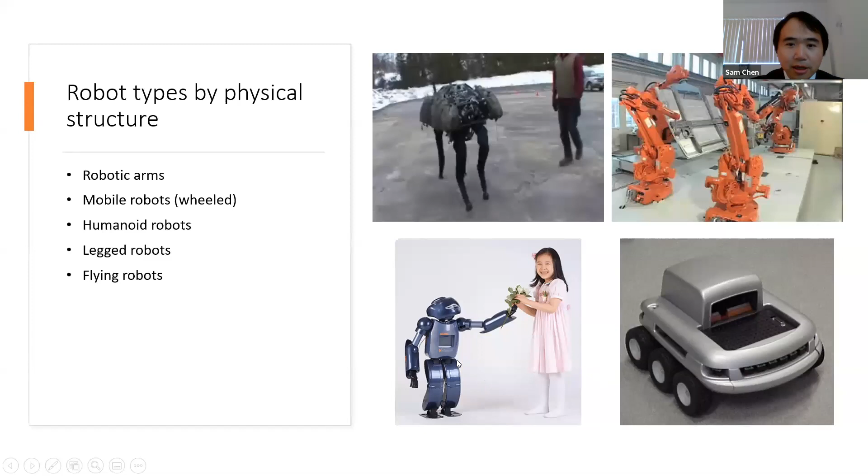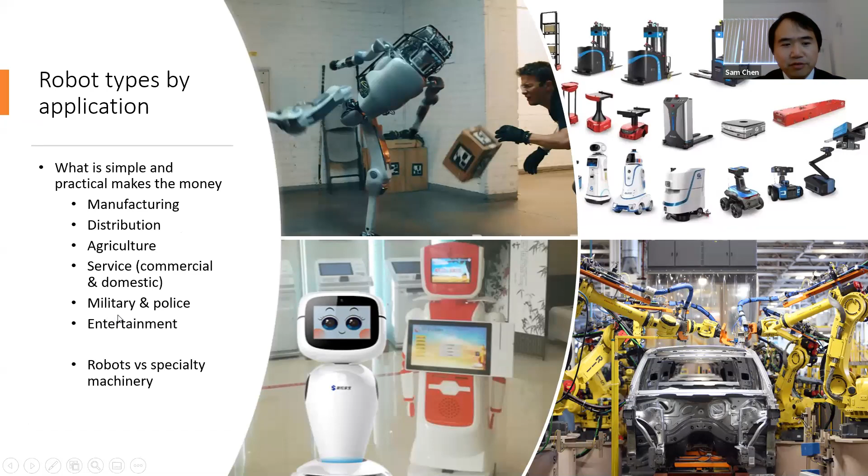By application, there are a lot of robots working in manufacturing, distribution, and agriculture. More and more of them now work in service, followed by military and police functions, and some robots work in entertainment.

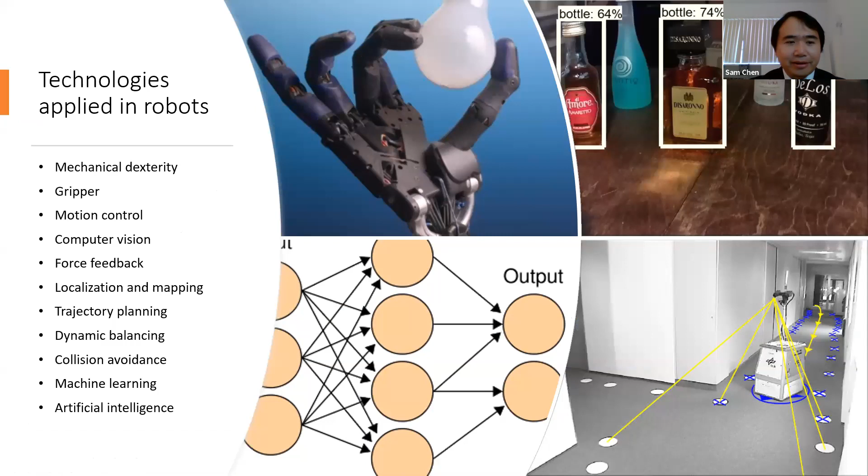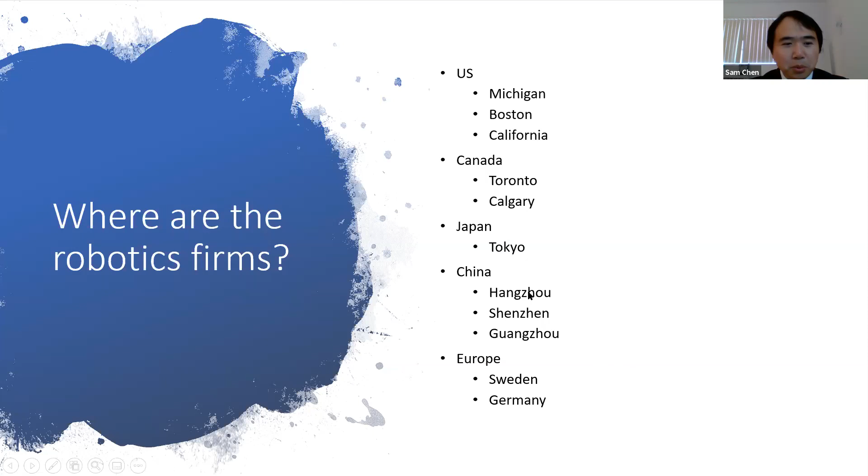There's a wide variety of technologies behind modern robotics, such as mechanical dexterity, illustrated by this mechanical hand, very similar to a human hand. Then there's machine vision and machine learning, which here is a graph of a neural network. And there's another technology for mobile robots called localization and mapping. Those are the locations around the world where robotics firms are very dense.

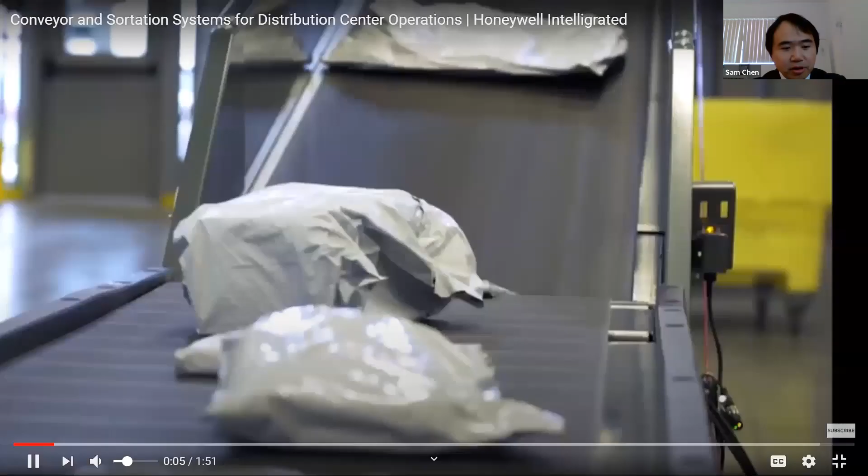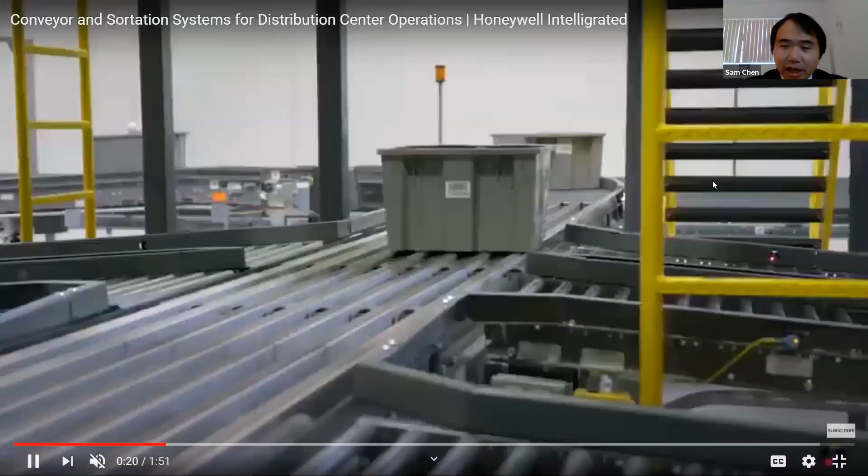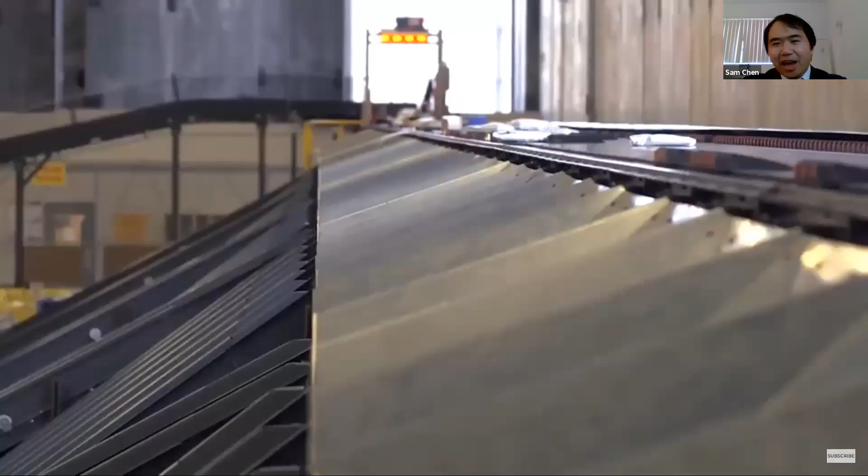This does not meet the e-commerce demand, because e-commerce has literally made the volume of processed goods probably 10 times higher than it used to be. Therefore...

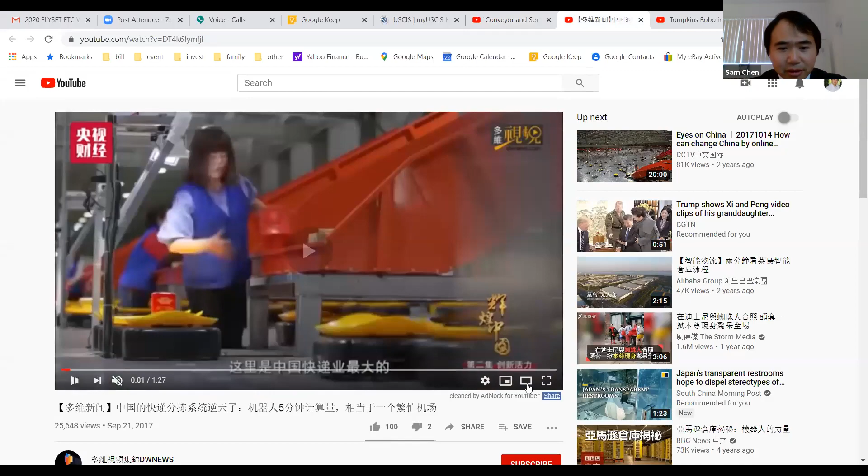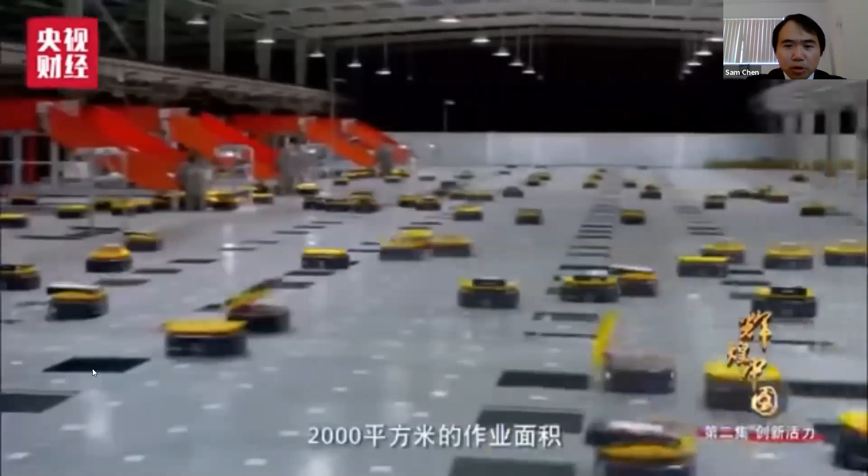This kind of robot we call the mobile sortation platform. Those robots are individual, each like a computerized robot, and you can put thousands of them in one facility. They are two-dimensional or even three-dimensional, moving on a large platform at about 2 meters per second. You see all those holes in the platform - those are destinations.

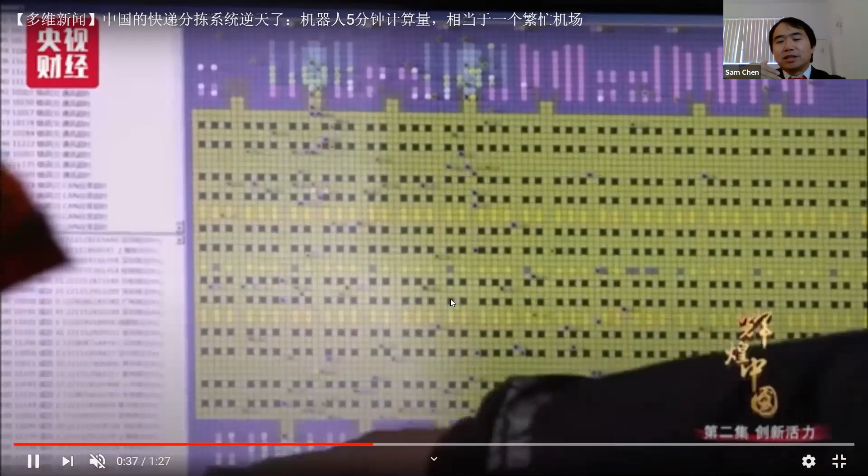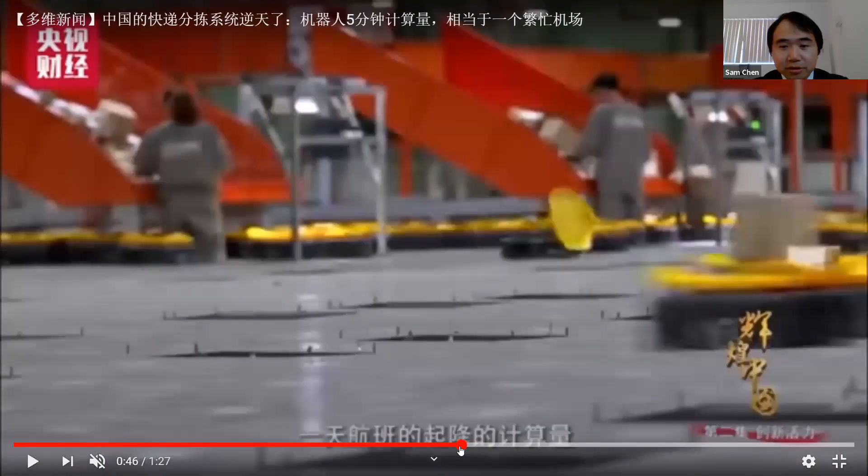All those packages or goods go to a certain destination or a certain customer. The robots carry all the products - they come through this inlet dumper, all mixed together, and a human operator takes them out and puts them on each robot. The human operator doesn't have to do any sortation; all she or he does is put the products on each robot. The robot will come, pick it up, and do the sortation itself - the robot knows where the product goes. This is really what's powering the logistics of modern-day e-commerce delivery.

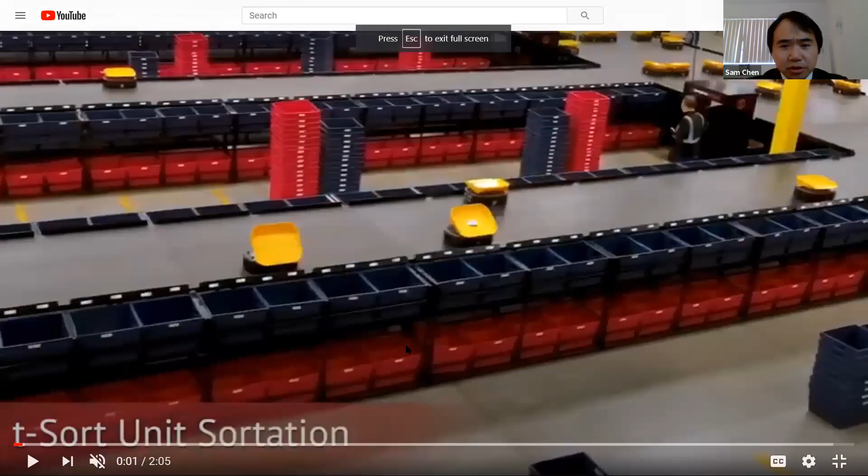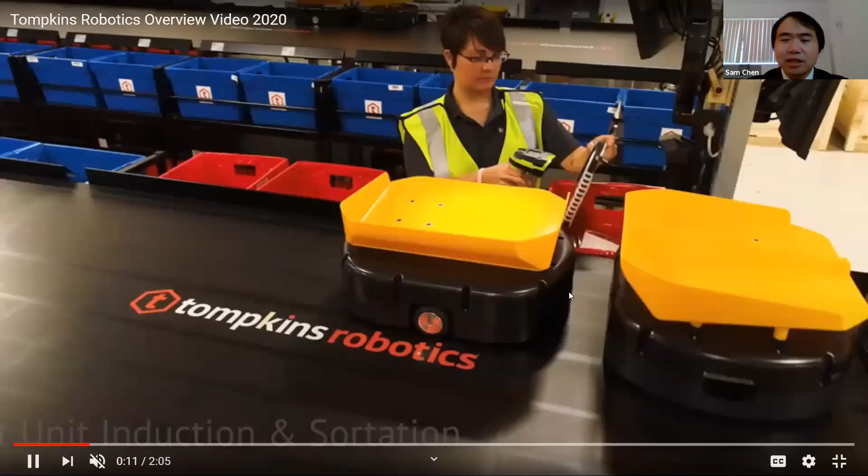That's how we achieve 2-day delivery with Amazon or Walmart these days. So the version I just showed you is the Chinese version. When we brought the technology to the US, we had to adapt it to a different system - for example, all the destinations are in bins or chutes on the outside of the field.

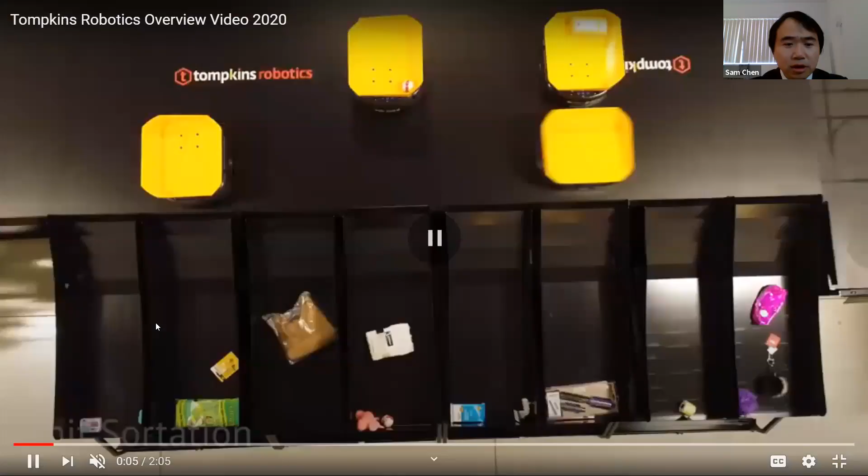So we did 2 changes. One change is to locate the destination on the outside edge rather than in the holes on the inside, okay? I see some chats.

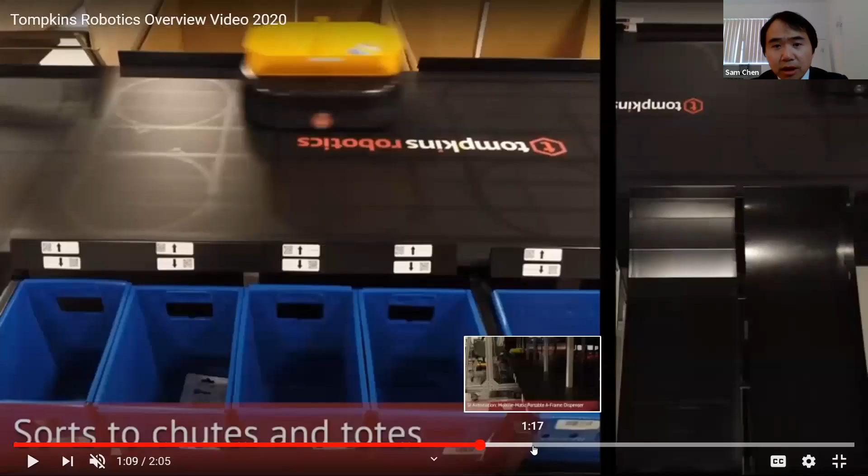Okay, great. So that's one change because the US warehouses, they're built very differently. And another technique we introduced is, let me see if I can find it here. Oh, here we go. So see this robotic arm?

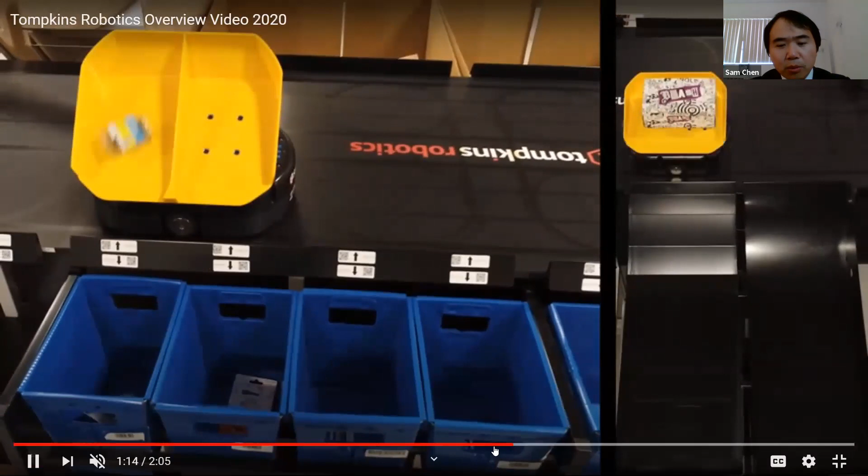It replaces the human operator you saw in the previous video. In China, they use human operators to pick the things from a box, from a dumpster, and put them on the robots. But here, we introduced the US technology, which is to use this autonomous robotic arm that's aided with vision to pick. So that's a huge step forward, okay?

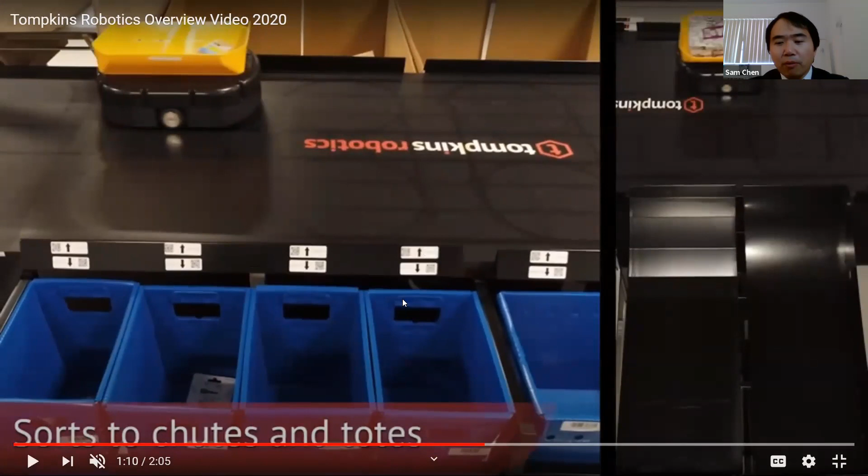So these videos, you can watch the full thing later on your own, but I want to talk about the technical aspects of the system. Let me go back to the presentation, okay.

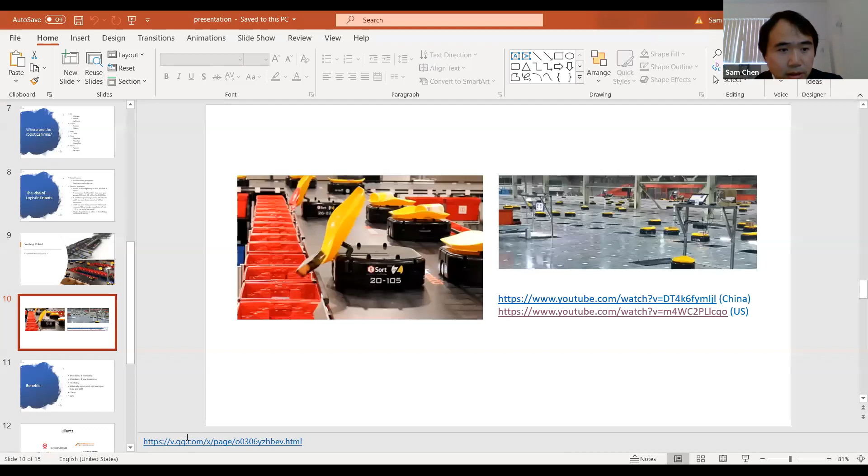So what are the benefits of using robots? First, robots, they are modular. So for example, if we put down 1,000 robots to process 10,000 orders per hour, next year, we have more volume, we have more customers. We can just put down more robots processing the same order.

If we use traditional machinery such as conveyors, then you can't really connect more conveyors to them because they're not modular, they're not like robots. It's just the number of robots you have to get it right. So we have the scalability with mobile robots.

And the next benefit is low downtime. It also has to do with the modular pattern of the robots. Let's say a robot breaks, its battery blows up, or one robot crashes and destroys itself. It's very easy to deal with. We just take out that robot, it doesn't affect the rest of the crowd, okay?

With the traditional conveyor-based sortation system, it's linear. So it's thousands of portions or sectors of conveyors that are connected together. If one sector of the conveyor breaks down, the whole system cannot run. So there's a much higher requirement on the uptime of the conveyor system, but with the robots, we can tolerate the robots breaking down or any other issues.

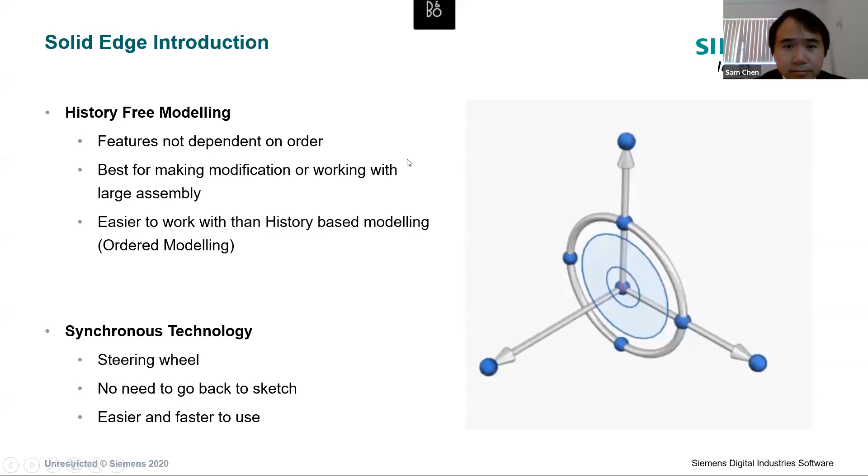So a little bit about Solid Edge. Solid Edge is history-free modeling, which is a little bit different from history-based modeling, where everything is dependent on the steps taken to create a model. In Solid Edge, it is considered history-free, so the features are not dependent on the order.

Let's say we make a part file, a model, a car for example, and it has 100 different parts and features. Let's say you get to feature 100 and need to go back and change feature number 2. What you're gonna have to do is roll all the way back to feature number 2, make the change, and hope the rest of the features dependent on that change don't get an error. So that is what it is for, when you have large parts, large assemblies, that is what it is used for.

So Solid Edge is history-free modeling where the changes you make, all the features you make to a model, are not dependent on what steps you take. You can also change the order if you so desire, because designing is not a fixed process. You could be making a car and design it 100 different ways, so the order that you make it should not be a limiting factor. This is best used for making modifications or working with a large assembly.

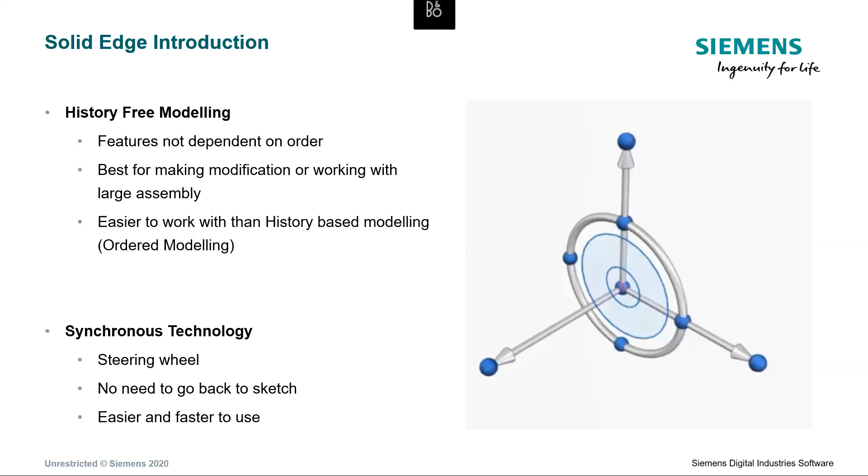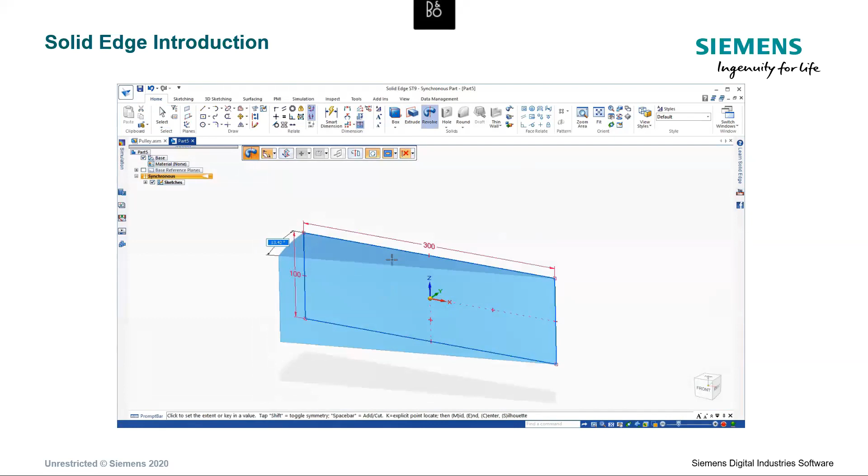So this is the UI, the user interface for Solid Edge. It kind of looks like a Microsoft Office product, where you have the tabs and different commands. So simply go ahead and create a rectangle. When you click inside of this, you'll see the arrow pop up, and you can immediately start extruding. You can push in, pull, go in one direction or both directions. You can even move the steering wheel to the side and revolve automatically. So for this one, let's go ahead and extrude symmetrically about the plane. Now you'll notice how the dimensions from the sketch directly migrate onto the solid model itself, and you can make changes to the dimensions directly, like we're doing right here.

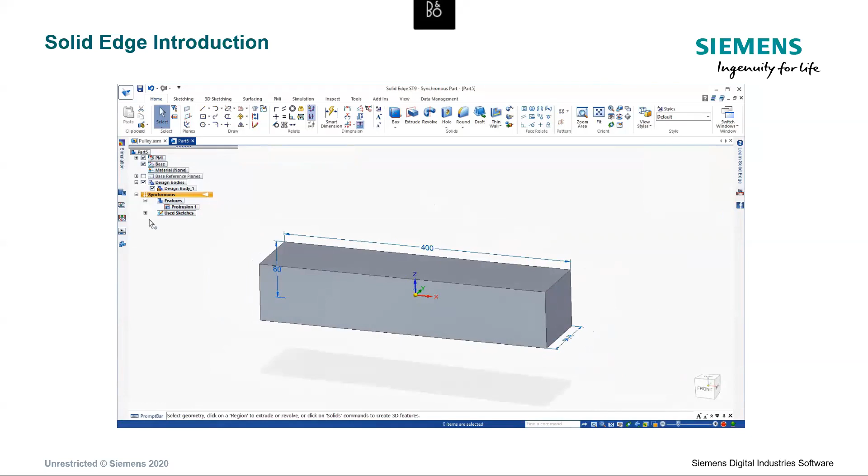You can even make modifications to the model itself without having to go into commands. You'll notice there's a little design intent panel on the top right side, which appears because we created the sketch symmetric to the coordinate system in the middle, so it automatically detects a symmetry relationship. If we don't want that, we can uncheck it from that panel.

We can make modifications just like that. I was talking about how you can go ahead and delete the sketch as well, so the solid model will not be dependent on the sketch at all. If you were to do that in other software, you'd have a problem and a whole bunch of errors. Now we'll create a little line, a little region, and push in and pull out immediately, without clicking any command whatsoever, directly from the model.

Let's say we want the vertical section and rotate it about 15 degrees. If we were to do it on a history basis, we'd have to go back to the sketch, change it, and then roll it back. In this case, we can make direct modifications by selecting and moving the steering wheel to the axis, and immediately start rotating. We can even make it longer if we wanted to, or move it to the side, making changes right there and then.

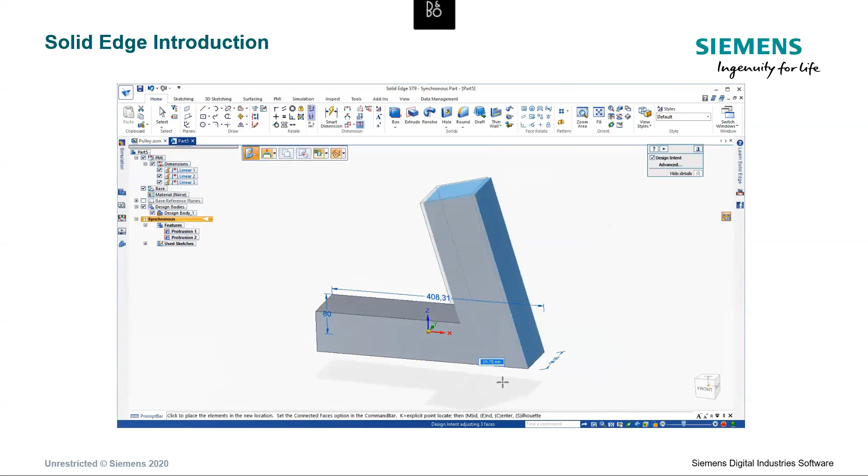So that's just some of the cool features and an example of how you can use Solid Edge. Now this is an example of a pulley assembly. This example will show you how to make modifications immediately just by one click.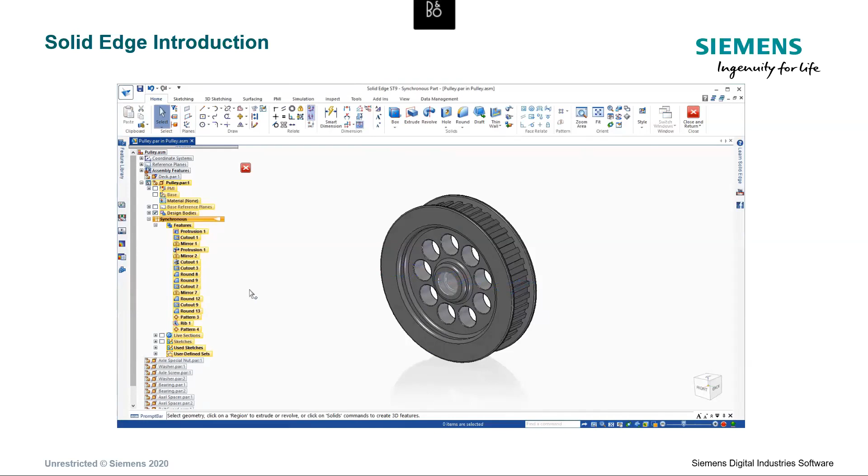There are a lot of features, a lot of parts, and we have to make modifications. How do you do it in a large assembly? Well, by selecting a few specific features and using the steering wheel, we can immediately make the pulley wider, instead of having to individually change the holes, the rounds, the fillets—all of those changes happen immediately.

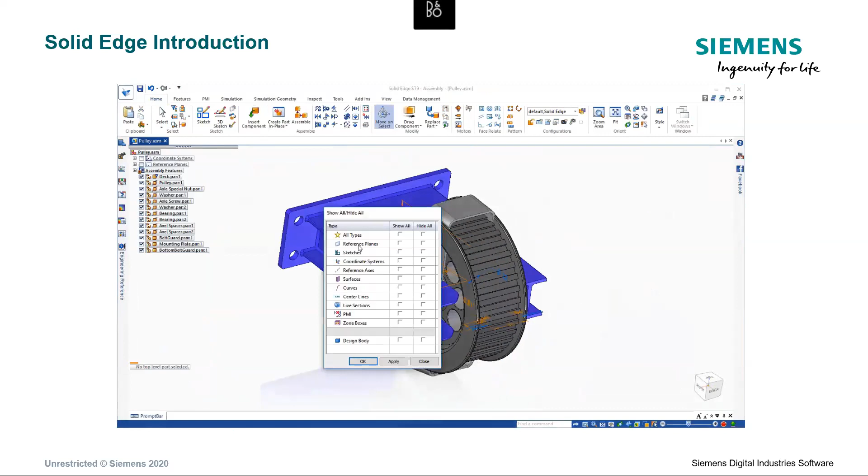Now you'll notice once we made the pulley wider, it's not fitting into the assembly. So what do we do? Should we make it wider individually? No—this is Solid Edge, so we're going to do the same thing: use the steering wheel by selecting a few specific faces to make the entire assembly wider.

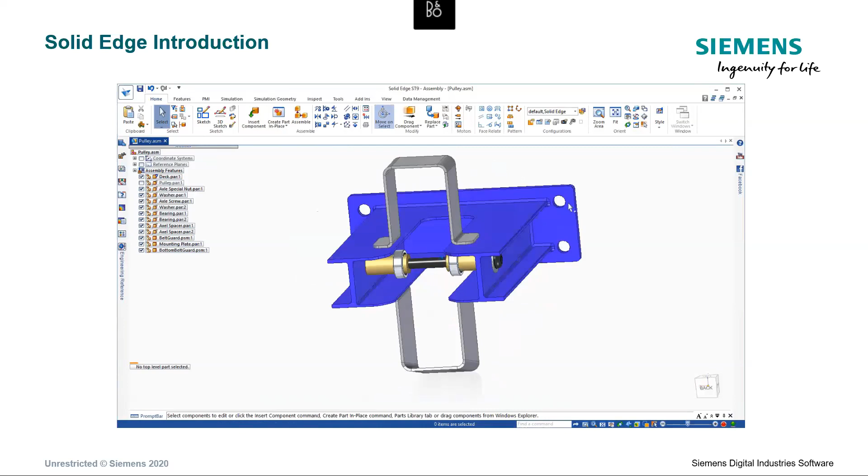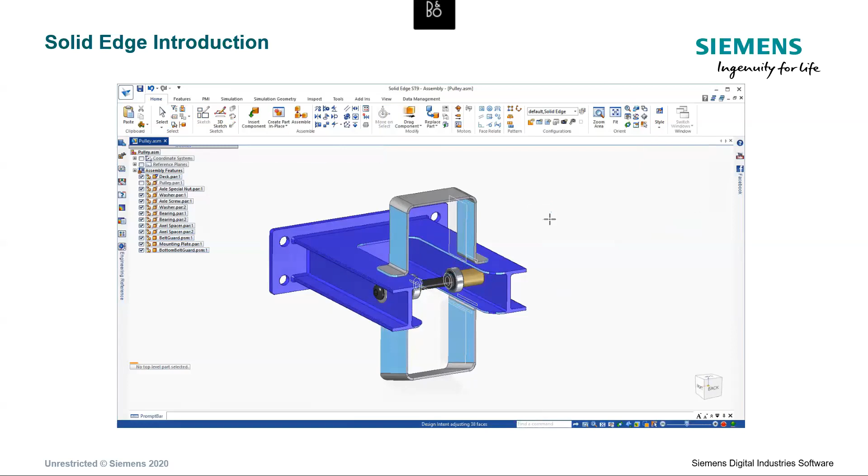So we select a few specific faces that are going to dictate how wide the assembly is. Then, using the steering wheel, with just one click, we can make the entire pulley assembly, the holder, wider by 10 millimeters. Then we bring the pulley back in and can see immediately that it's a good fit. So making a few modifications doesn't require changing all individual parts or components.

On this one, we're going to make the spacer, the belt guard, match with the top one, and we can even make it wider just by selecting it and using the coplanar command. Just like that, we're able to make it longer without having to go back to the sketch or individually make those changes.

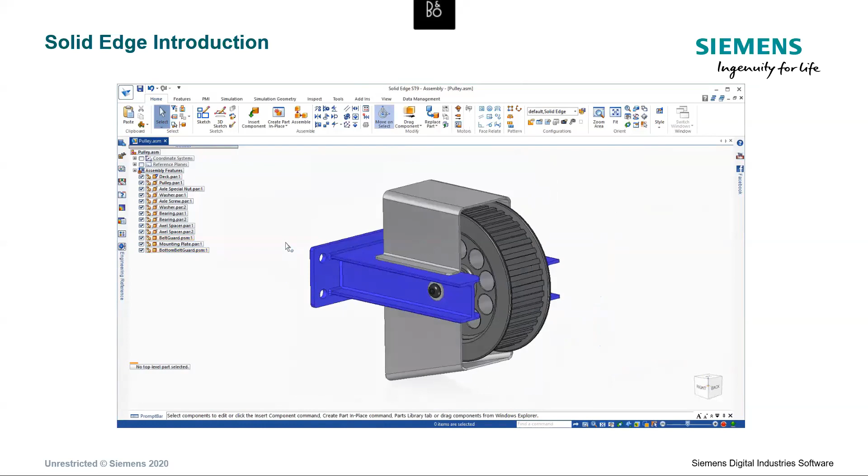What about if users are using CAD files from other software? Solid Edge allows you to bring in part files from SolidWorks, Fusion 360, Creo, and others. Because Solid Edge is history-free modeling, we don't have to worry about how the parts were made—you can make direct changes to the model and continue your progress where you left off from that other software. So if you're using Fusion 360 and want to try out Solid Edge with a part file you made there, you can immediately bring that into Solid Edge, which I'll show you in a second.

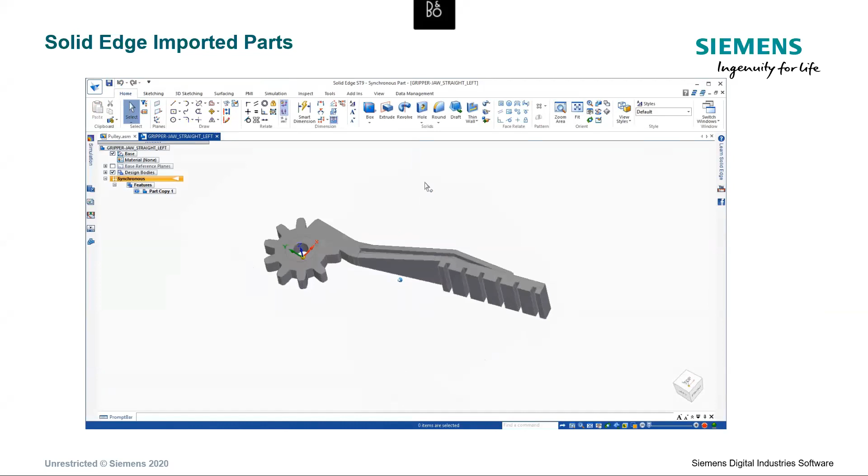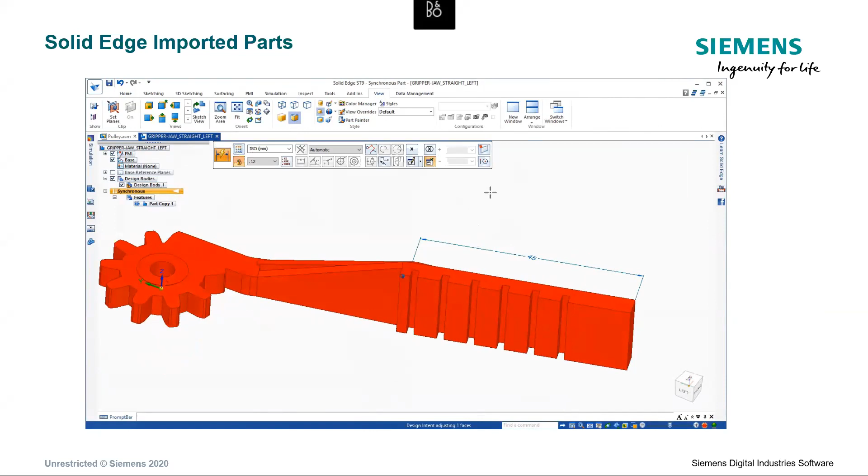So in this example, we're going to bring in a jaw gripper that was made in SolidWorks. When you bring in a part file from other software, it does not contain any features, as you'll see on the left-hand side. It's considered a dumb solid because it doesn't have features. It works for Solid Edge because Solid Edge doesn't care about the steps that were used to make the model. We're going to immediately start making changes just by placing a few dimensions and then making changes to those dimensions. We can start changing the model itself without having to worry about the sketch or the steps.

So we'll make the little extension. We can make it one side or both sides.

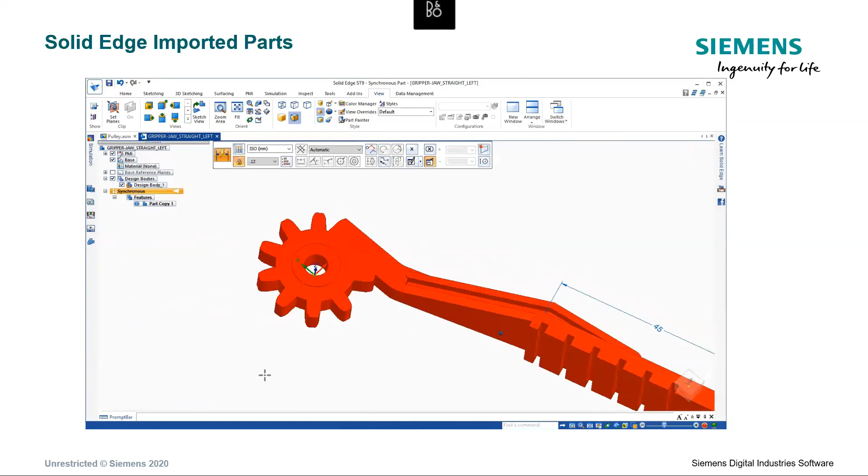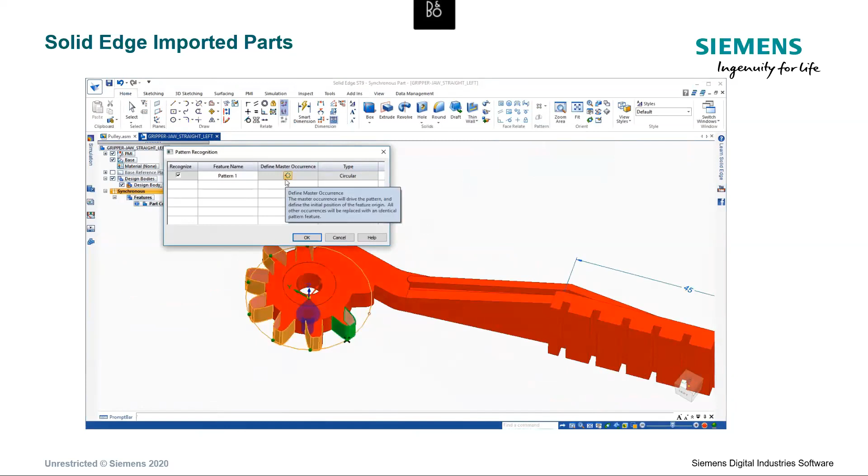Now, another feature that Solid Edge has is pattern recognition. You'll notice it because the teeth in the gripper have a red circular pattern. We can use the pattern detection tool, and it automatically detects there's a circular pattern, saying that some of them are suppressed. By pressing OK, it automatically detects and comes into our Pathfinder, our feature tree. We can immediately make changes from 10 teeth to 12 teeth, just like that, without having to redesign or go back to the sketch.

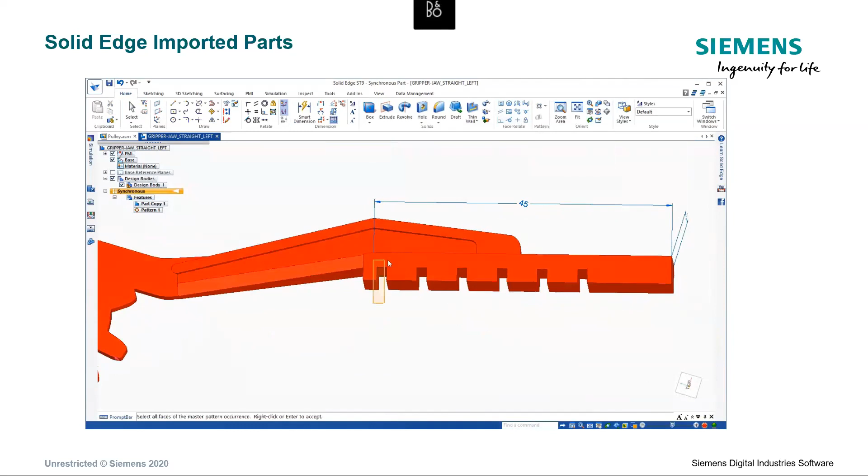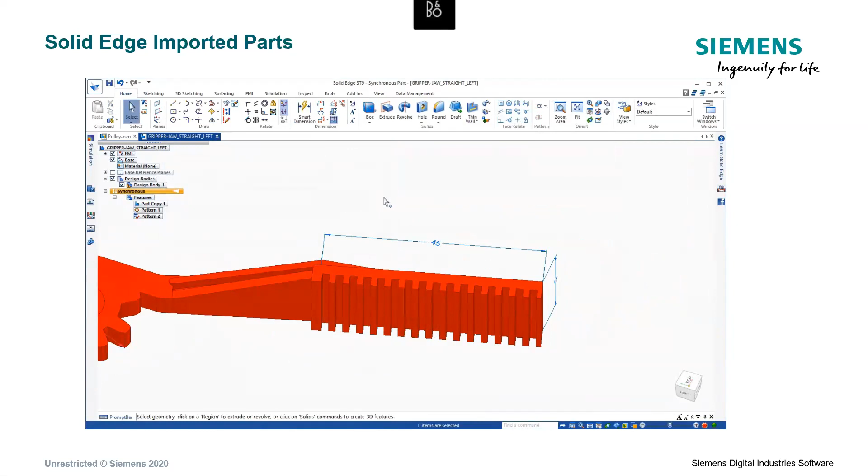We'll do the same thing for the rectangular slots. Just by box selecting those, we can detect that there's a rectangular pattern, and we can make changes just like that. From 6 teeth, we can make it however much we want. So without having to make any changes or modifications, we can easily do that now.

Now this model is sitting on top of the coordinate system, and it's not symmetric to it. So if we were to pull the middle section, you can see right there that it's not symmetric. What if we wanted to make it symmetric?

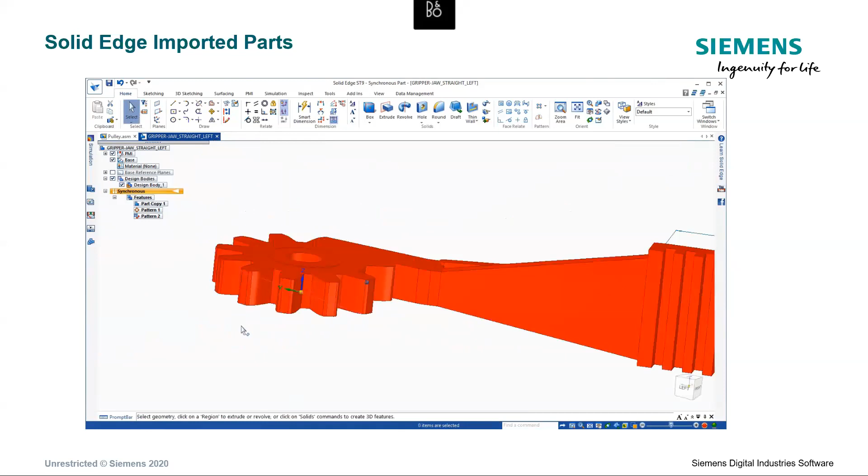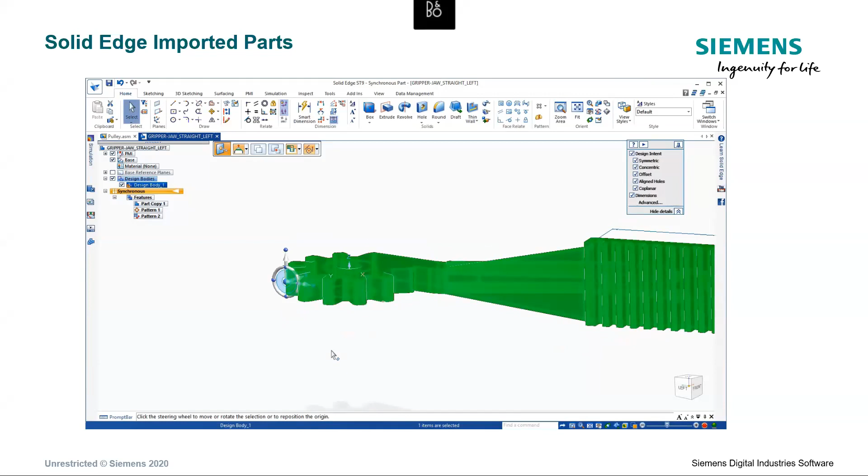We can easily change that by selecting the entire model using the quick pick, and we can take the steering wheel and put it into the midpoint of the model and match that to the coordinate system. The midpoint will be exactly on the coordinate system. So now when we pull it, you'll notice the software automatically detects there's a symmetry, so it pulls in both directions. If you want to turn that off, you could just press S or use the design intent panel.

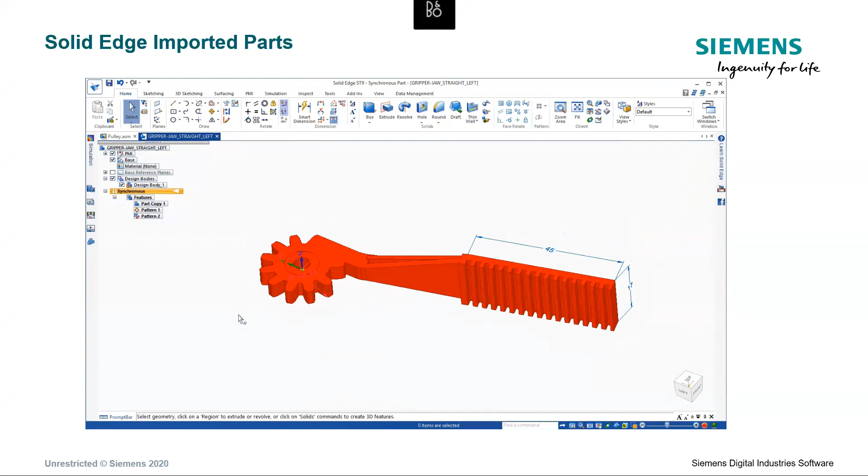So that's just an example of how you can bring in part files, part models from other software and immediately start making edits and changes and continue where you left off.

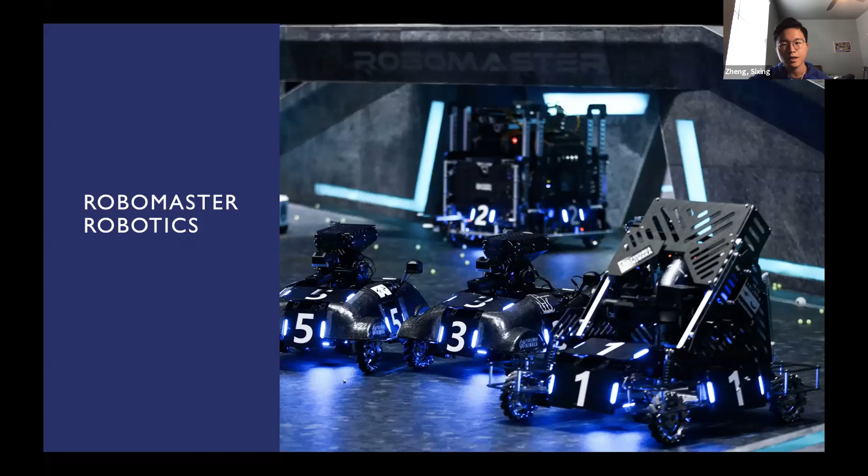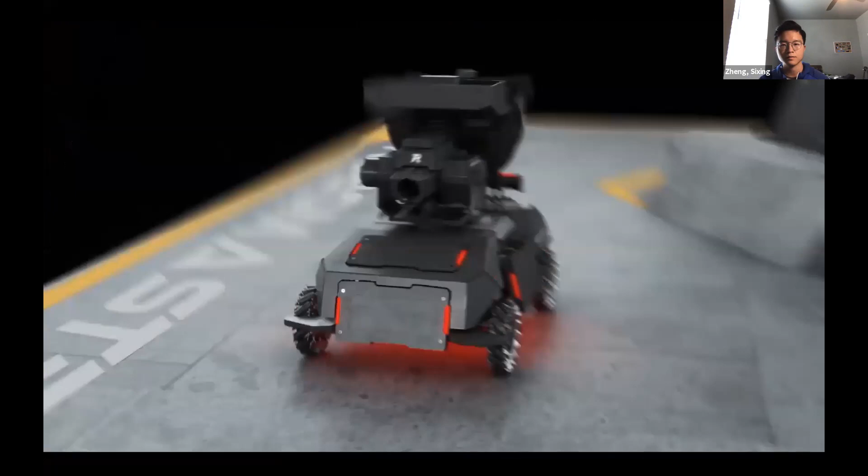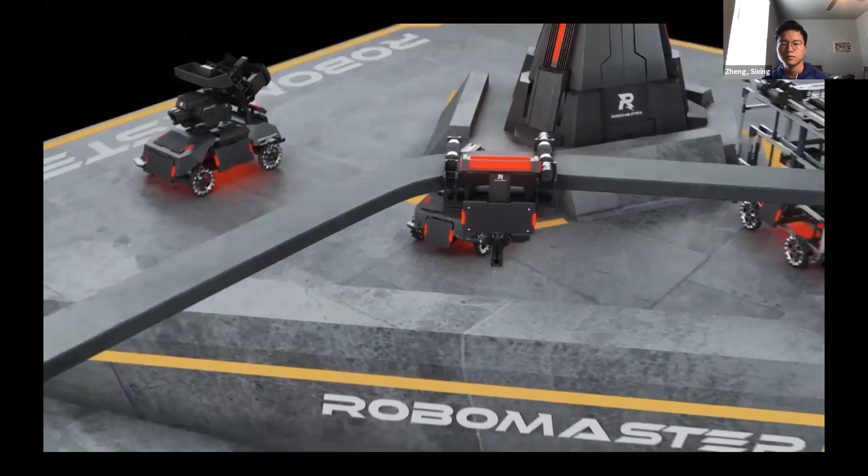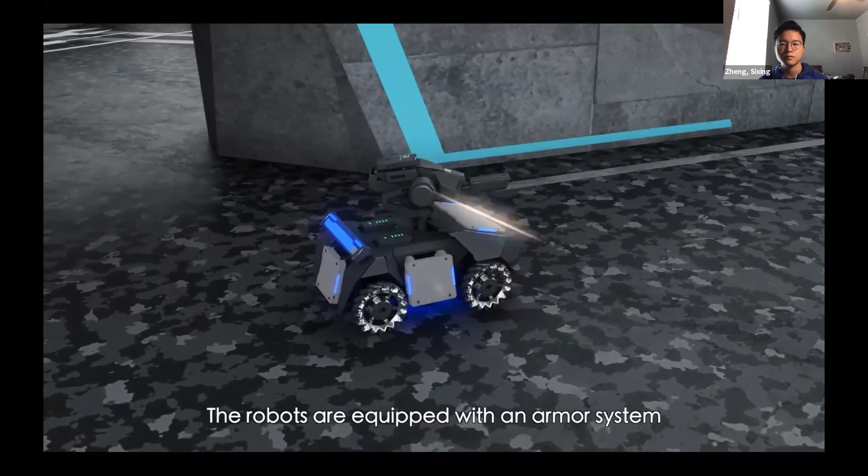Welcome to RoboMaster 2019. There are 5 different robots on each team: Hero, Standard, Engineer, Aerial, and Sentry. With each robot operating in first-person view, teams must begin from their starting zone, navigate a rune-filled battlefield, and find and launch projectiles at the opponent until they are eliminated. The robots are equipped with an armor system that detects projectile hit data, resulting in lowered health points when triggered.

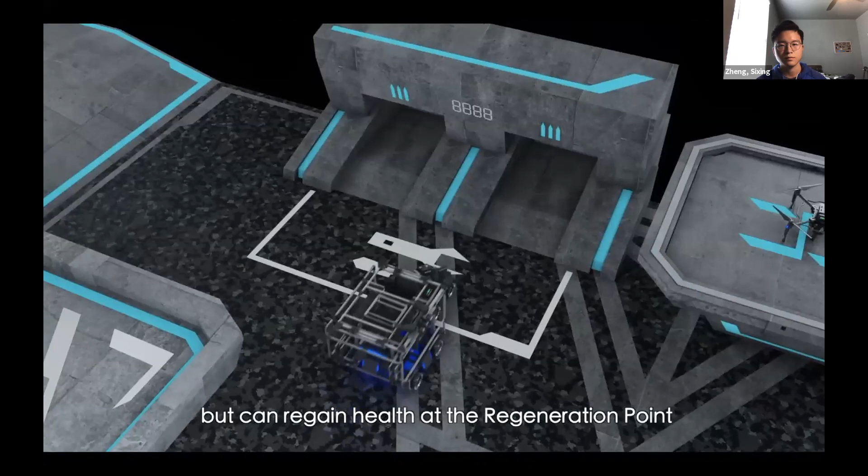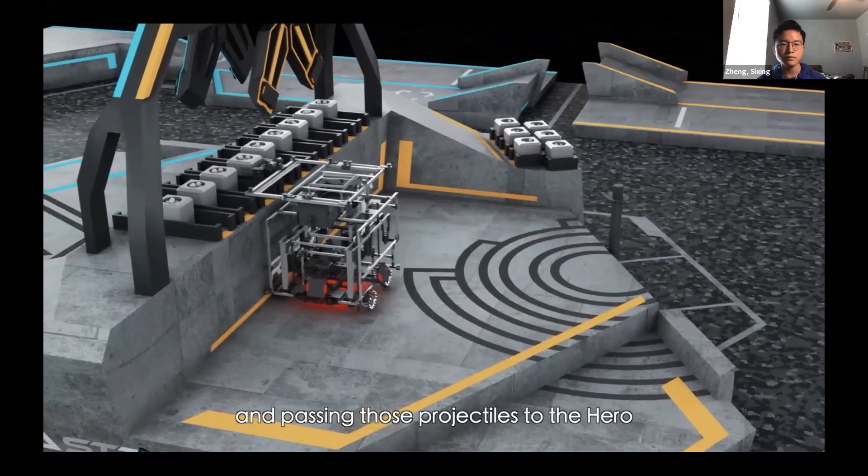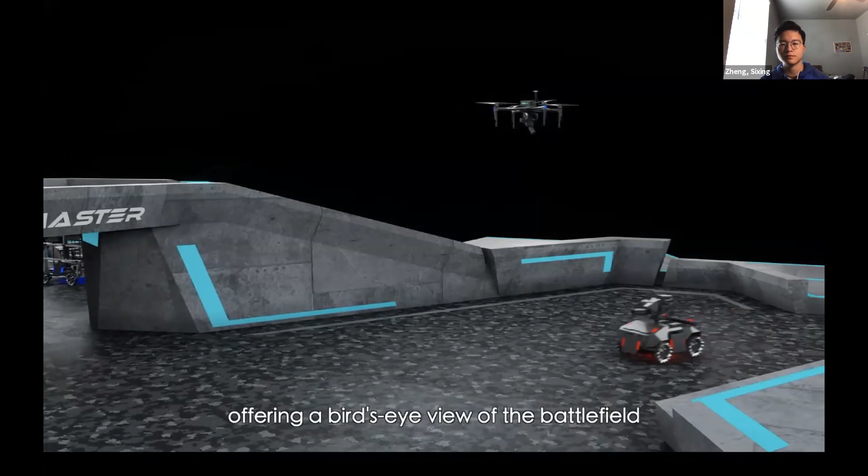Robots are destroyed if their health points reach 0, but can regain health at the regeneration point. Playing a supportive role on the team, the engineer is capable of acquiring larger, more damaging projectiles from the resource island and passing those projectiles to the hero. The aerial is a subtle yet essential player of each team that can be incredibly advantageous when used wisely. It must be charged as much as possible before taking off. The aerial can fly overhead, offering a bird's eye view of the battlefield while firing on enemies below. As the only fully automated robot on the battlefield, the Sentry can detect enemies' defense capabilities and shoot them.

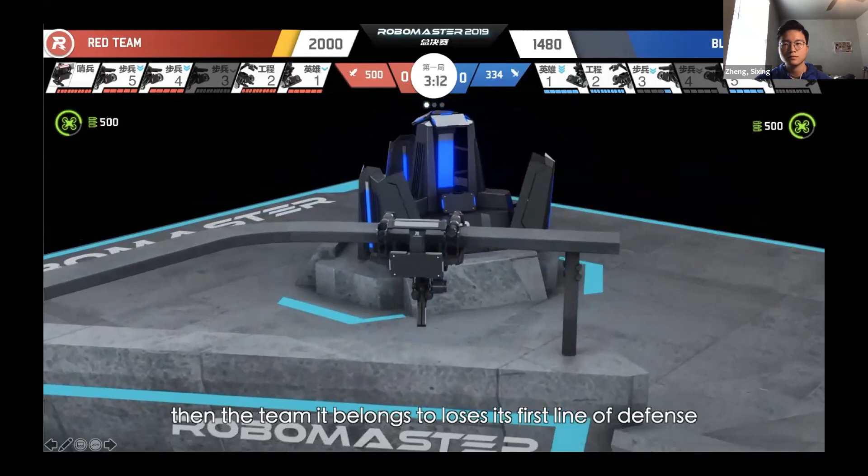If the Sentry is destroyed, then the team it belongs to loses its first line of defense. The team that destroys the enemy's base first is the winner. If the 7-minute limit of the match runs out and both teams still have their bases intact, the team with the highest total HP wins.

Welcome to RoboMaster. As you can see, this game is pretty interesting. It's basically League of Legends, but in reality. And these are the 3 robots of the top 3 universities from last year. This is the Hero robot. The Hero robot, they have bigger projectiles and they move around the field to hit the enemy robots. As you can see, it's fairly complicated and we built almost everything by ourselves.

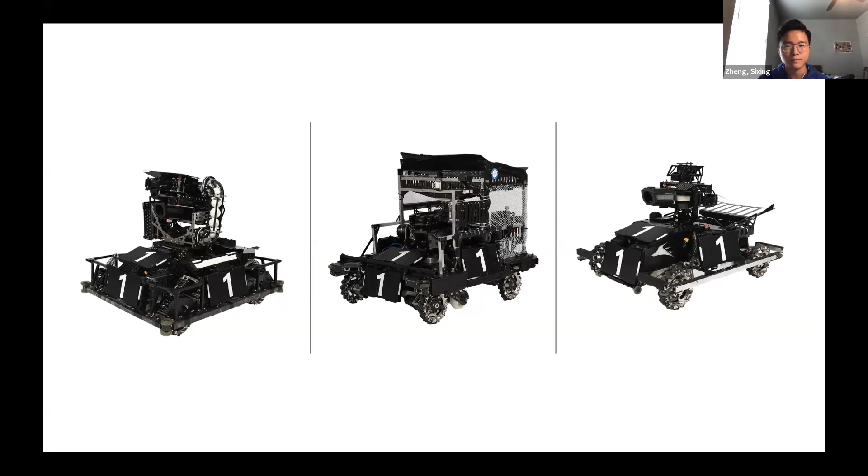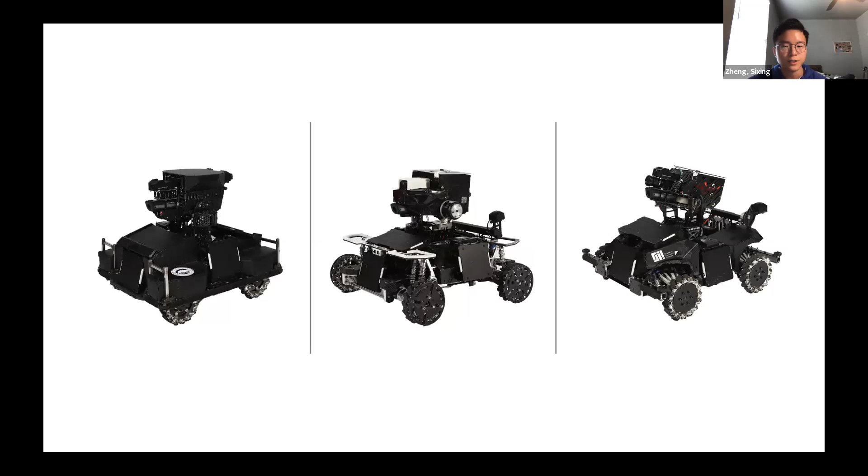For example, you can choose whatever CPU or GPU you want to use in this robot, or any OS systems. Also, for my team, we actually 3D printed the gunner ourselves and used the motors to shoot the bullets. And this is a closer view. This one is the standard robot. This one is smaller than the Hero, but it moves faster and shoots more frequent bullets, but with less damage.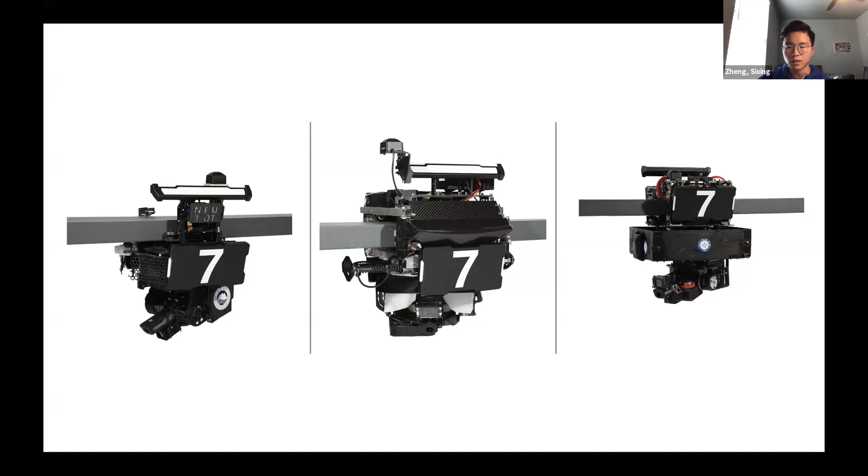As the video talked about, there are 5 different kinds of robots, but for this year they actually added 2 things. The first one is the dart system, which you can launch to hit the enemy base or outpost. And then the radar system, because everything is first-person view, with the radar system you can know what's going on the entire map.

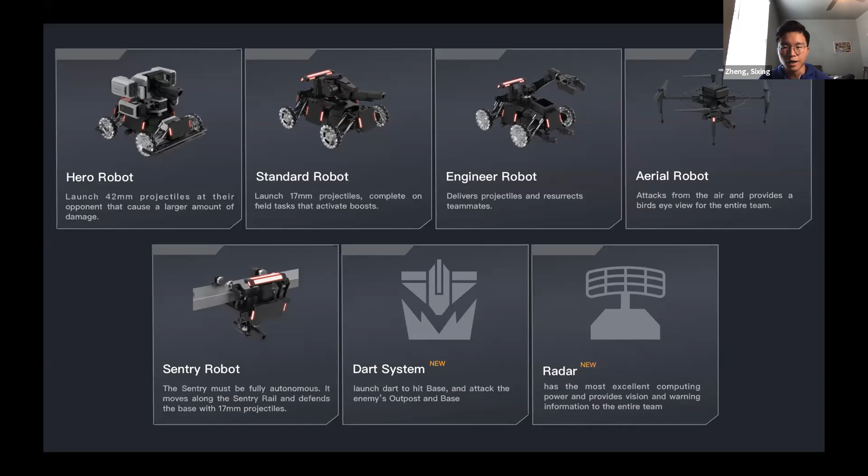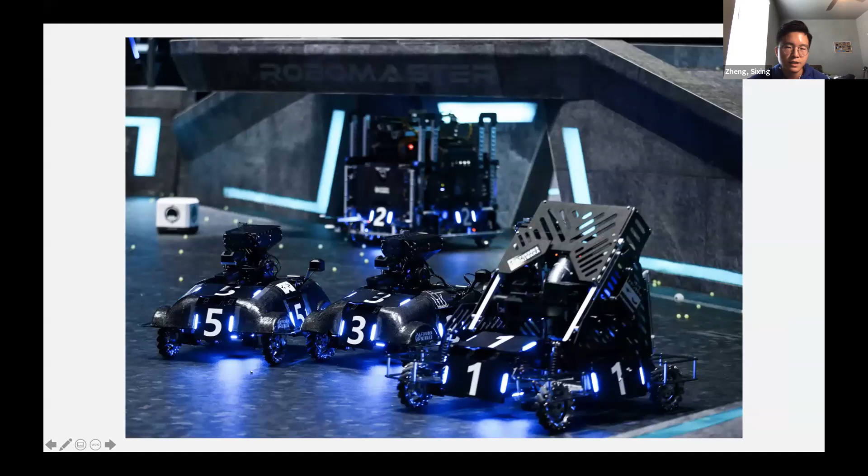So how do we do that? First, we need to detect the armor plates. As you can see, the armor plate is comprised of two bright blue lines with a number in between. Some teams actually use pure OpenCV to detect the armor plates. This is computationally cheap because it doesn't use machine learning models, but it doesn't really cover the edge cases, which might cause inaccuracy.

So for my team, we actually used a machine learning model called YOLO V3, which we trained with thousands of armor plate images, so the robot can detect the enemy armor plates.

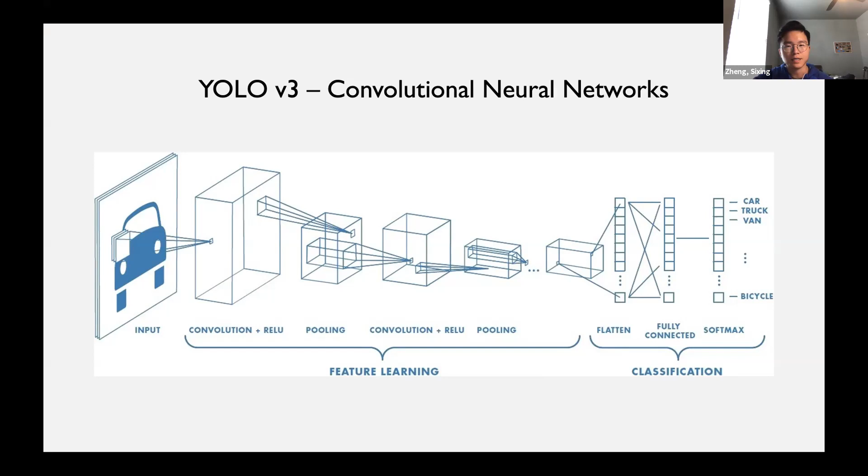First things first, we need to know what the input image is. A video is comprised of a lot of frames, which are images. Each image has a lot of pixels, and each pixel has 3 colors.

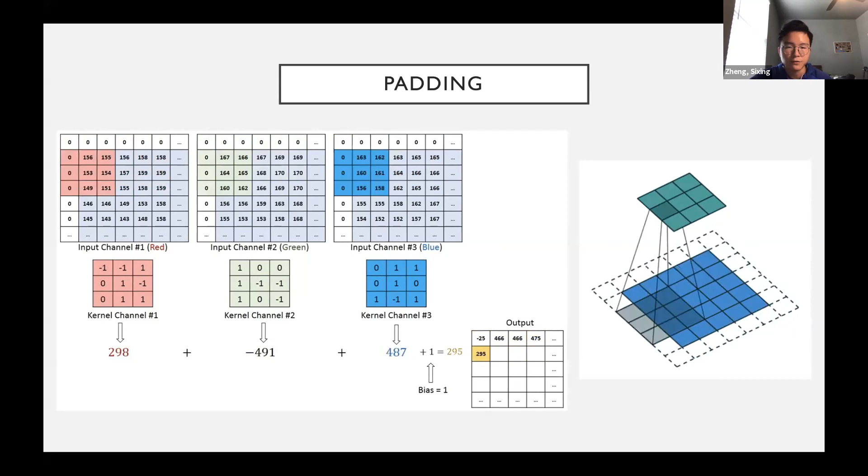And right here is the pooling layer. The pooling layer also uses a filter, similar to the convolution layer, but the purpose is different. For example, if you have a 4K video at 60 frames per second, and you try to process that much information directly, it's going to be really slow because that's a huge amount of pixels.

That's why we use pooling. For example, if you have a 4x4 image, and we use max pooling, we look at 4 pixels at a time, find the max value, and make that the resulting pixel. So we're basically decreasing the spatial size of the original image.

Or we can use average pooling, where we find the average value of 4 pixels. So there are different kinds of pooling methods, but the whole idea is to decrease the spatial size, because sometimes we don't really need every single pixel. If we use every single pixel, it might increase accuracy, but it's not really worth it because that's just too much computation power.

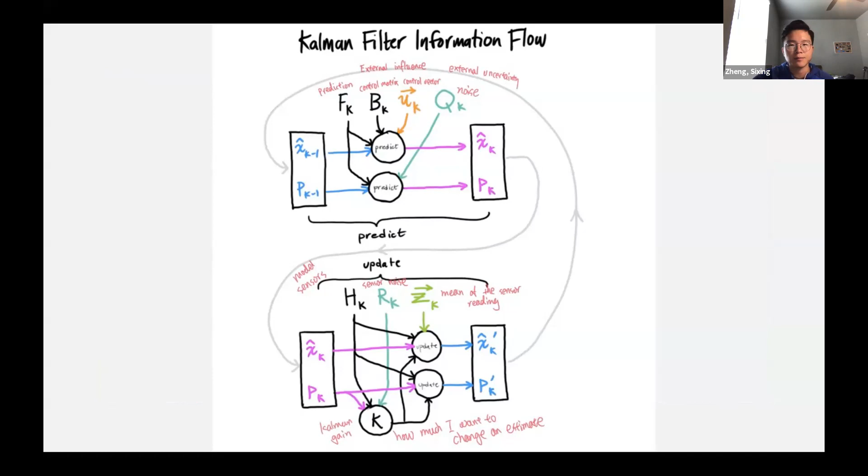And if you master all the skills that I talked about above, or you have some even better ideas, you can dominate the game.

Almost down, that's going to be really bad for Evolution. Where is Zhao's drone? Oh wow. 2 minutes, 30 seconds remaining. Why have they not put their drone in the area? Oh, the double kill, very nice. Red 1 just got 2 kills there.

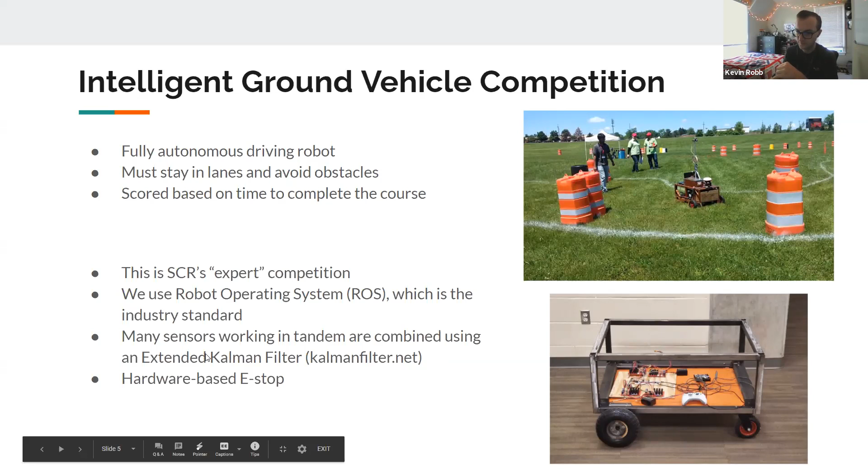I'm not going to take too long on this, but why do robotics in college in the first place? That's kind of the big question I end up talking to a lot of people about. The ultimate reason is that it gives you a team to work together, learn together, and just have people to hang out with. My primary friend group is the robotics team, basically what it was in high school too.

It's just a really cool environment. You're learning stuff in your classes, but that's a professor teaching you things, whereas if you're on a robotics team, generally you and your friends are like, it would be really cool if we had a way to detect the lines better. Then you spend time researching, and you learn a lot more than you would in your classes because you're doing it on your own, and you get to do it with your friends as well.

So you get some really cool applicable skills. I know there's a grad level class called Control Theory at OU, and by the time we are juniors on the team, we have already learned some of the stuff you get in that class just by being on the robotics team. Really cool stuff—gives you great projects to talk about in interviews, grad school apps, anything like that.

I don't think I've talked about classes at all in interviews. I talk about my projects through SCR, I talk about stuff from Hacklahoma, which is OU's hackathon, and I talk about my research projects. So it's going to be the best way to get some really solid experience.